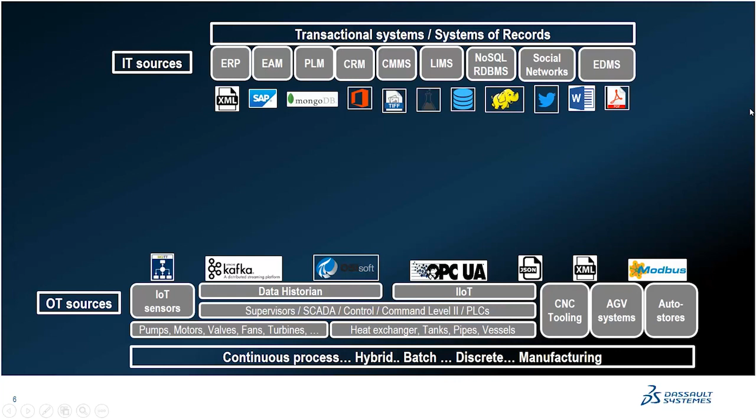Our experiences working with digital and business transformation projects suggest that we introduce an experience technology to virtually validate and contextualize IT and OT data, coupled with systems modeling, system simulation, analysis, and data intelligence. We should be able to help projects move towards production readiness.

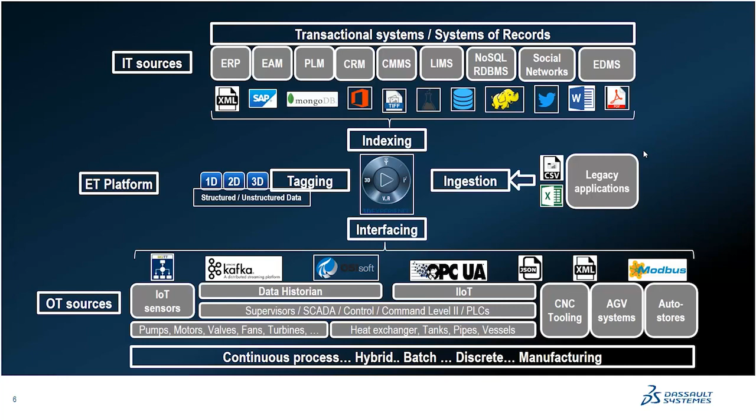Between IT and OT, we introduce ET here, experience technology, to contextualize IT and OT to optimize your business process. Let's discuss how 3D Experience Platform helps to achieve this cause.

Let's see with an example, a day in the life of an industrial IoT enabled smart factory. Industrial IoT with 3D Experience Platform are key components in helping companies maximize return on investment from smart factory initiatives. Specifically, 3D Experience Platform apps can be used to provide visibility into factory operations to gain efficiency. With insights from IoT data, manufacturers can improve the performance of their assets, their worker experiences, and improve productivity with flexibility. But what does a smart factory really look like in practice?

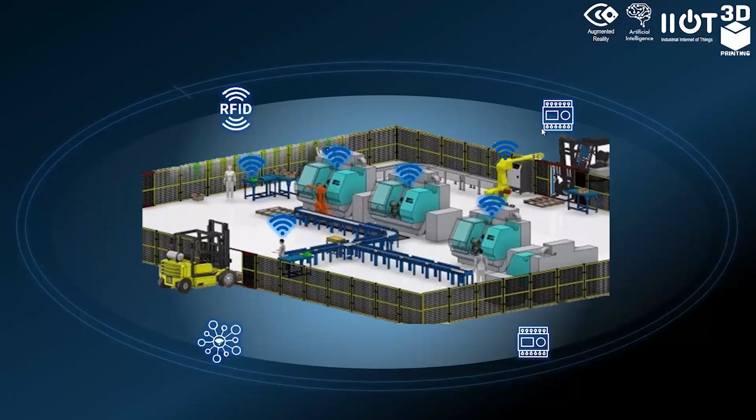Let's explore this by seeing a day in the life of an example, a fictional smart factory that uses IIoT, augmented reality, artificial intelligence with big data. Let's imagine the production shift from 9 a.m. to 6 p.m. At 9 in the morning, the production manager is validating his shift requirements of manpower, machine, materials, and methods while logging into the warehouse and inventory management portal.

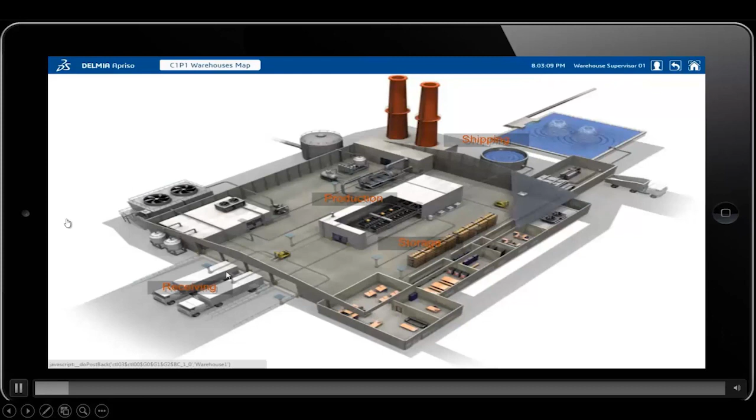He validates various materials at different locations, and realizes that he does not have enough material and components to fulfill his complete shift. But he also realizes that there is sufficient material to start his production. For the first half of his shift, he has all the raw materials.

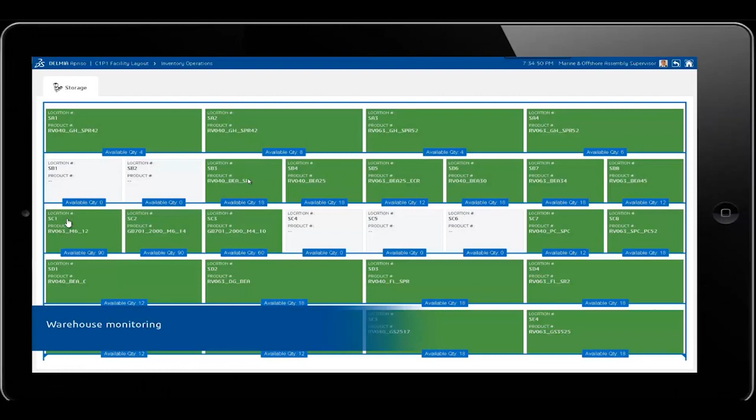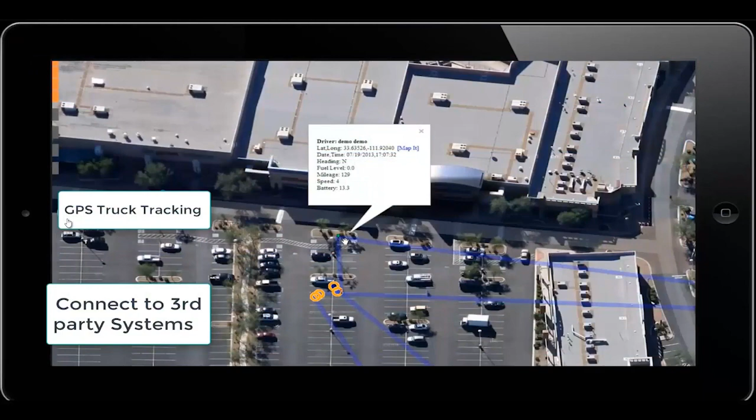But he's eager to know the status of the remaining raw material coming into the factory through electronic devices installed on the truck transporting this raw material. It sends its signal and location via cellular wireless network to the supply chain visibility system, which shows that the estimated arrival time of the truck is approximately around 11 in the morning.

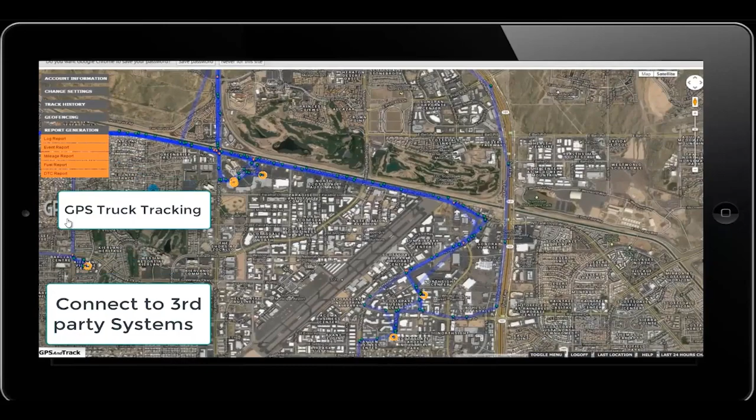Now, thanks to IoT, an alert is sent to the production manager with respect to the estimated arrival time on his smartphone as an advanced supply notification, which gives him confidence to start his production actions and work order execution.

Now the production manager starts to concentrate on his worker productivity, and the various stations are equipped with IoT applications that use integrated sensors to track machine activity. The application uses a cellular wireless gateway to transmit data into the factory's data lake.

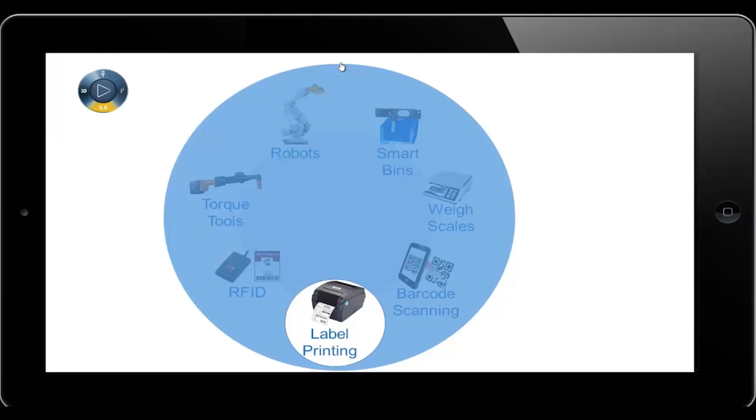The operator is also equipped with RFID for labeling items. These days, combining the use of RFID tags with both barcodes and QR codes allows the operator to connect to IoT with a simple scan of a smartphone or tablet. Having all objects marked with a QR code or barcode means improving the working environment, as operators will be more educated about raw materials and able to check for an item's availability.

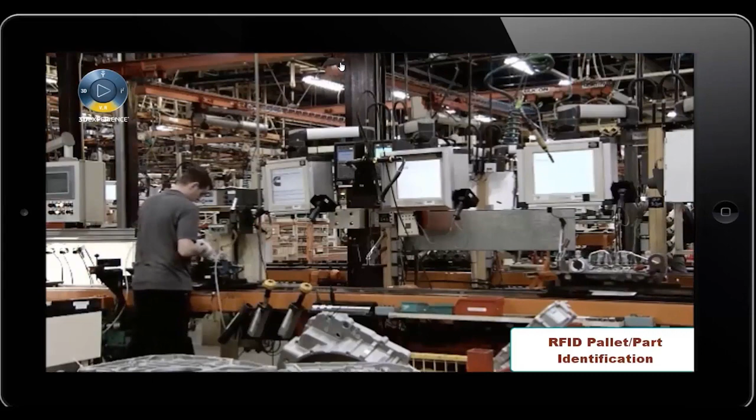So with this type of connected IoT infrastructure, the production manager realizes that one of his operators' efficiency is slightly down due to lack of skills, as this operator had replaced an experienced operator.

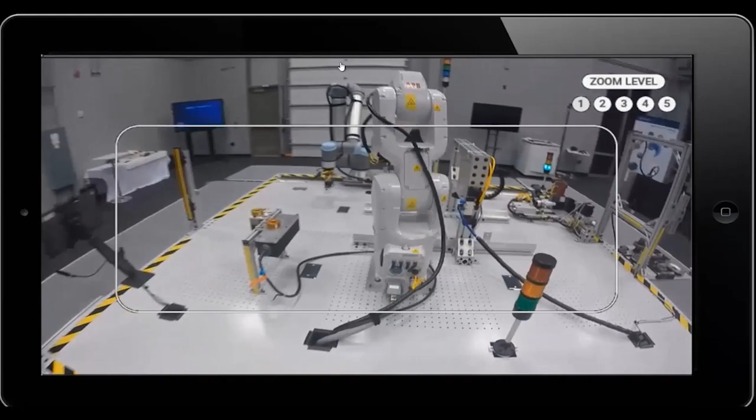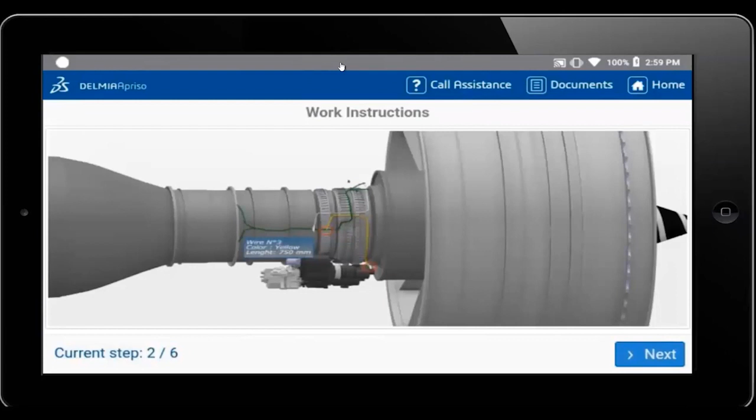This is where the production manager can assist the new operator with augmented reality work instructions, mixed reality work instructions, or even assisted reality instruction through video calls. Thanks to IoT, we have worked with our partner RealWear to enable collaboration with a field worker or someone on the plant, where he or she can collaborate and have access to remote experts through video calls. This allows operators who may not have training on a specific piece of equipment or method to get useful help through a video call.

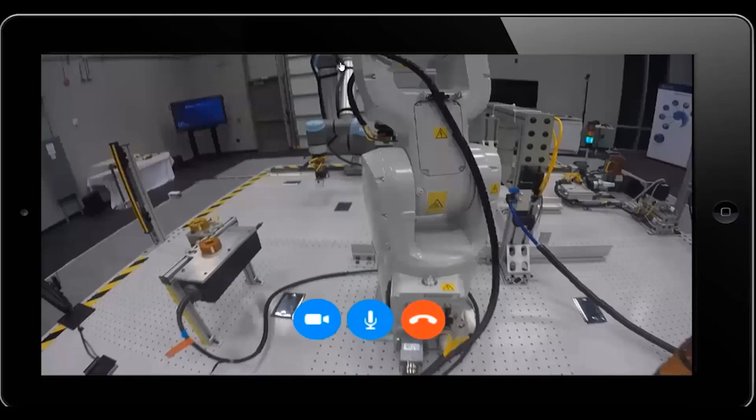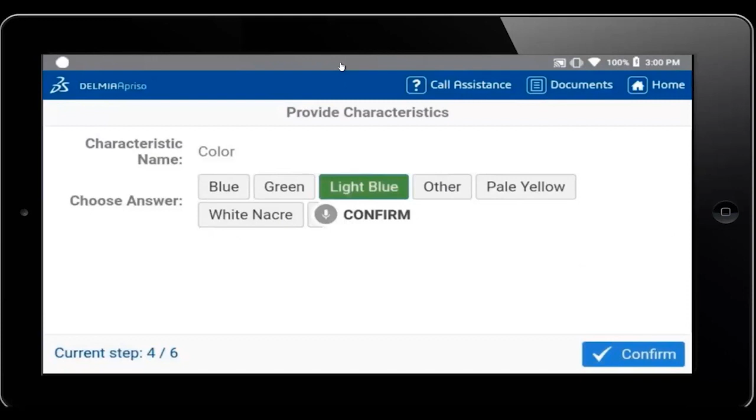Guided work instructions can provide knowledge in the form of step-by-step instructions, which can include text, diagrams, and voice commands, and zoom in to easily see the details, all while still being able to look at what is there in the physical environment. When employees scan the QR code, the device brings up the specific information required to do a particular operation or maintenance activity, and they also have visibility to all the documentation needed.

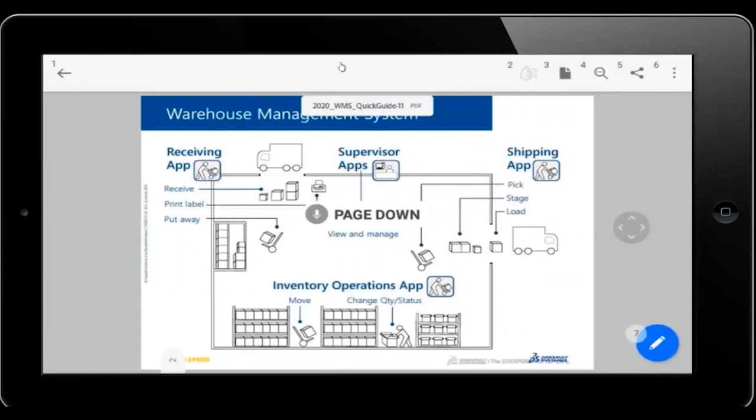Thanks to connectivity and increase in productivity, the factory is back on track to meet the production goals, and this is how operators can improve productivity, and even the production manager can intervene as and when needed.

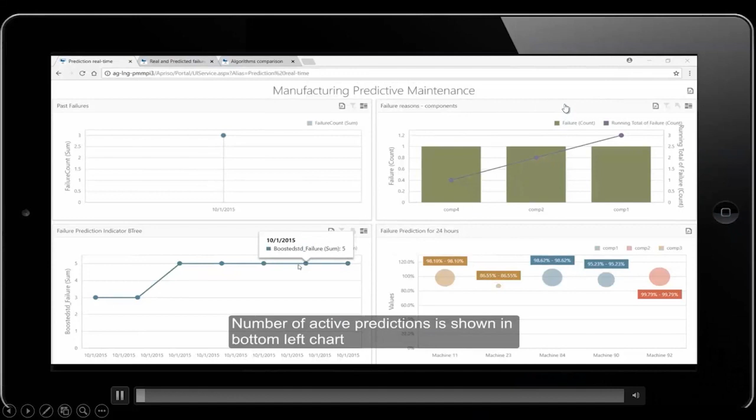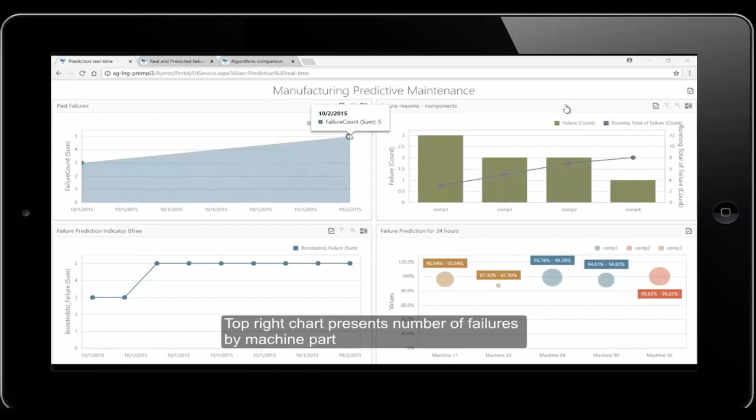In the early afternoon, the factory continues with activity. A senior operator is working on a thread grinding CNC machine, which in the past had unexpected breakdowns due to issues with hydraulic fixtures, reducing equipment availability and overall factory efficiency. Now the machine has been integrated with the DELMIA Apriso maintenance application.

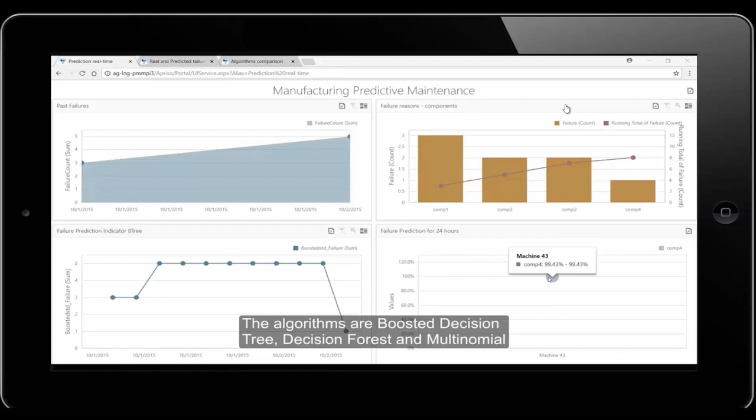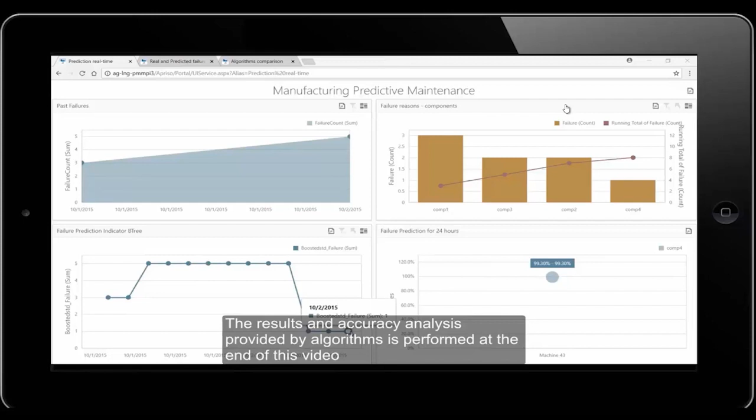Through the machine integrator, data is collected from sensors on the machine, and hydraulic pressure values are continuously monitored and captured via cellular wireless network into the company's data lake. We can use a configured application on this data for predictive analytics, and in this case we've used a boosting algorithm to predict the next action.

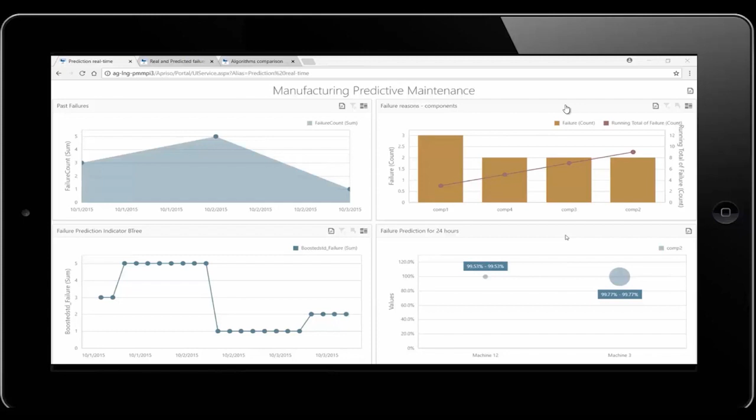With this prediction process, the production and maintenance manager can schedule a total productive maintenance action either in this shift or the subsequent shift. Doing so will not slow the factory's manufacturing processes, keeping production on track, and the subsequent maintenance action can be achieved through proper planning and scheduling.

In the late afternoon, the facility management team can take a look at energy consumption in the plant, thanks to IoT infrastructure and DELMIA Apriso for energy monitoring, which offers complete visibility of energy consumption and other utility consumption like gas in the manufacturing plant.

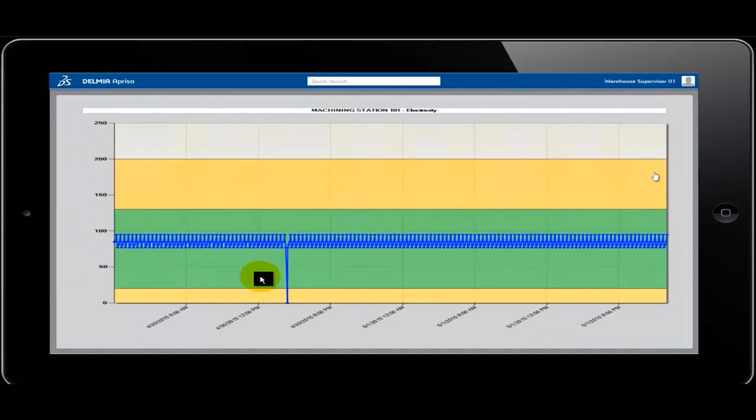With the energy monitoring system, you get real-time insights into your machine's availability and performance. This information is showcased on a dashboard that can be configured to your needs. The solution monitors equipment downtimes, which empowers you to reduce unwanted and unexpected equipment breakdowns and schedule maintenance. You can also configure overall equipment effectiveness, mean time to repair, and mean time between failure here.

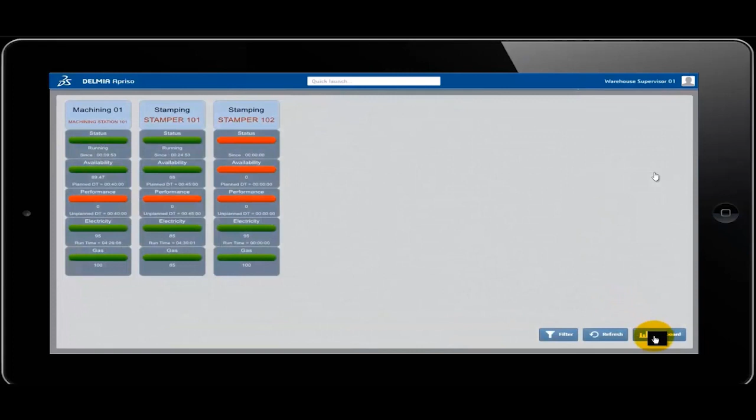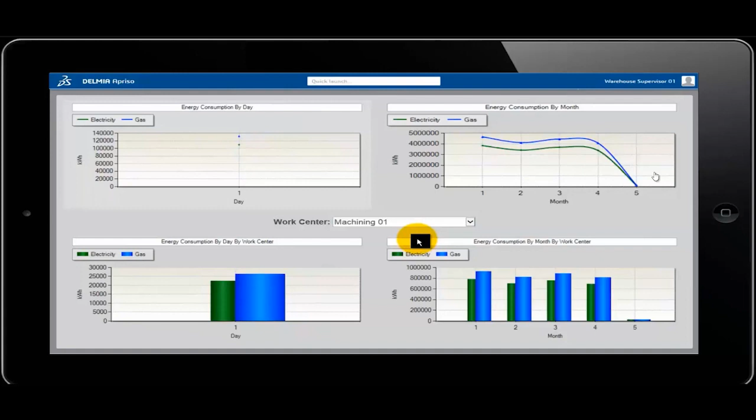With advanced data analytics, you can analyze the consumption patterns of your machines, which could result in detecting variation in consumption, optimizing cost, and getting real-time energy insights in your plant.

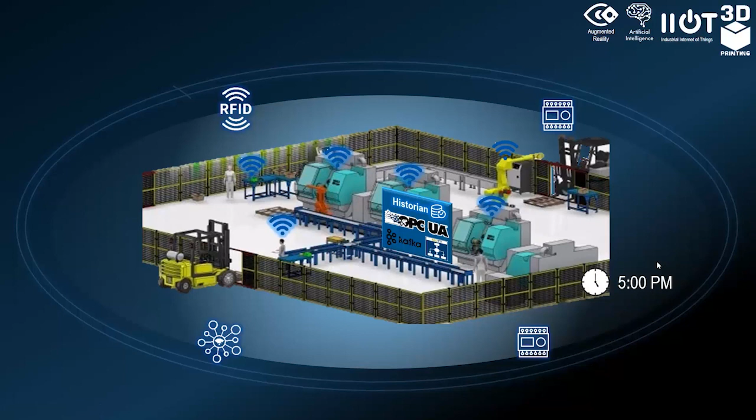Before the products are pushed to final assembly, the quality manager finds quality issues with a small batch of production. On this production line with multiple machines, robots, and conveyors, let's see how the 3DExperience platform helps identify product quality issues by detecting variation in the equipment and resource performance.

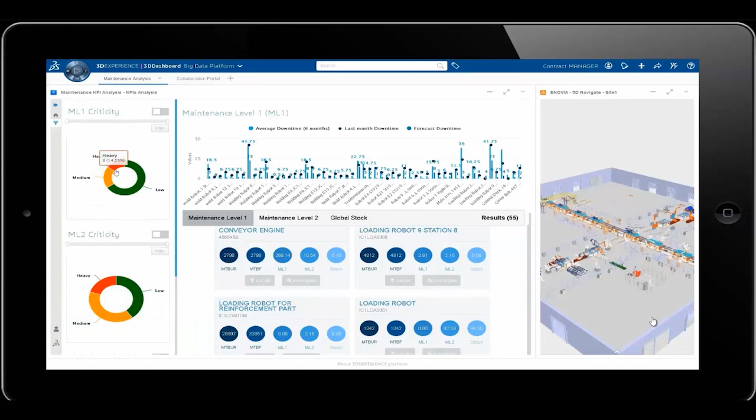In this case, the quality manager along with the production and maintenance manager collaborate remotely to identify the product quality issue. They use the 3DExperience platform's data intelligence to aggregate critical maintenance data and find that a few resources have downtime beyond standard mean time to repair or planned maintenance time.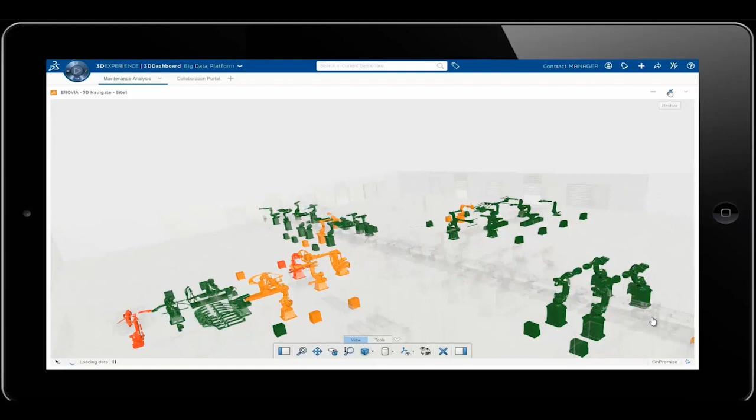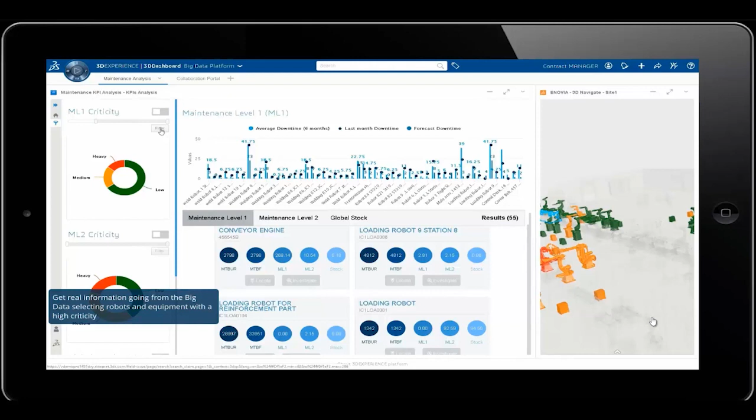Thanks to the 3DExperience platform's contextualization of IoT data, they're able to identify a particular set of equipment through inbuilt dashboard capabilities. With inbuilt algorithms, subject matter experts or data experts analyze and narrow down to particular equipment based on stoppages in previous months on a particular product line.

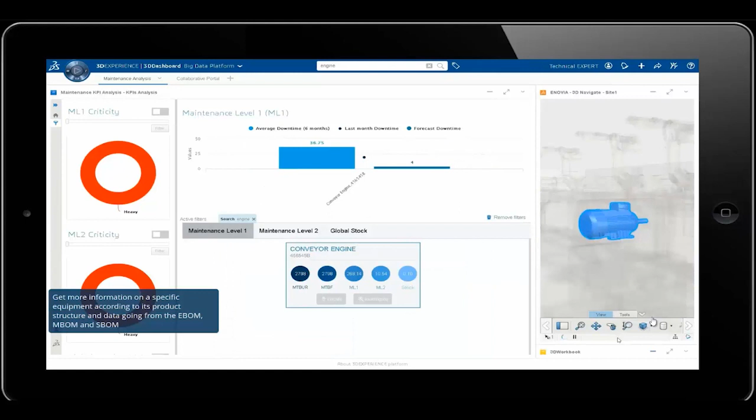The maintenance log also identifies this equipment as causing the issue. He then compares that with the sensor data, and is also helped by historical data coming from historians. Machine learning algorithms help narrow down the issue to the conveyor motor, the equipment seen slightly before, which is causing the quality issue.

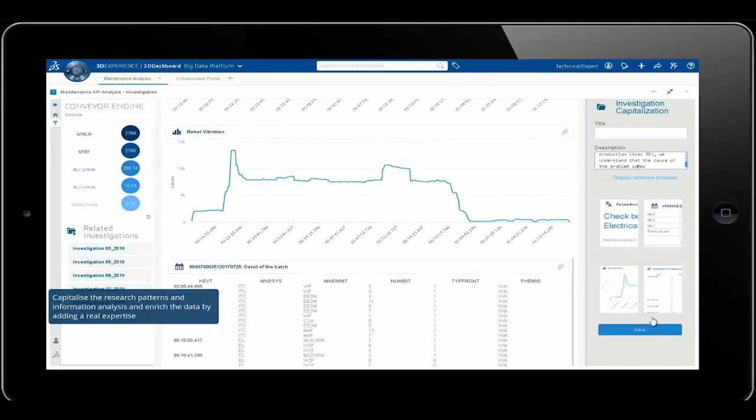This is how contextualization quickly helps narrow down a particular problem, and in this case, the quality and asset issue were solved in a fast and efficient manner thanks to the 3DExperience platform's data aggregation and data intelligence capabilities.

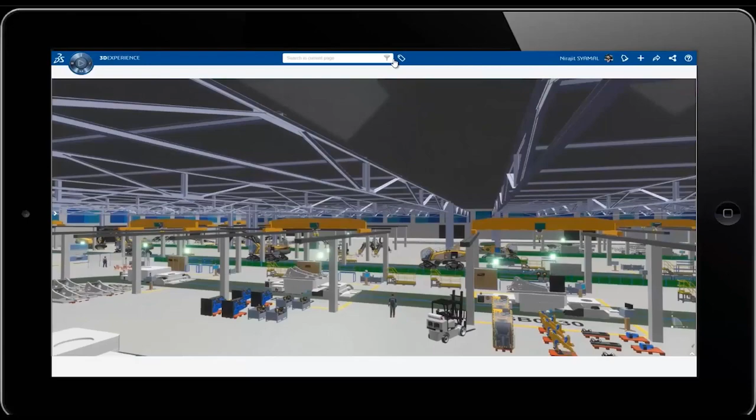As the day in the life of a smart factory demonstrates, the 3DExperience platform with IoT's ability to connect to and collect data from a manufacturer's machines, equipment, facility, supply chain, etc., enables manufacturers to dramatically improve factory performance. This includes all the previous steps seen, from validating advanced supply network notifications, productivity improvement of workers, predictive maintenance, etc.

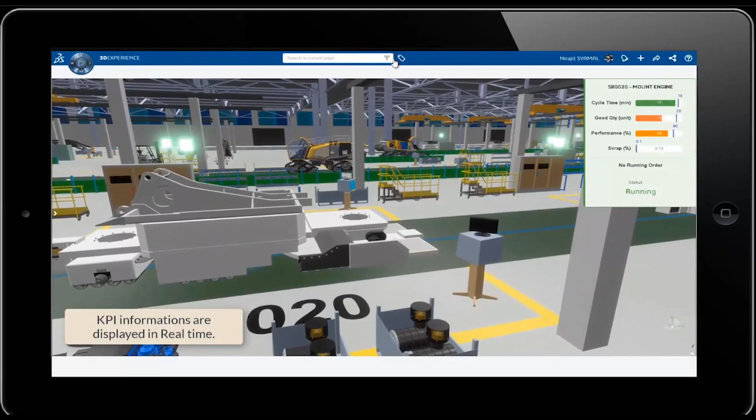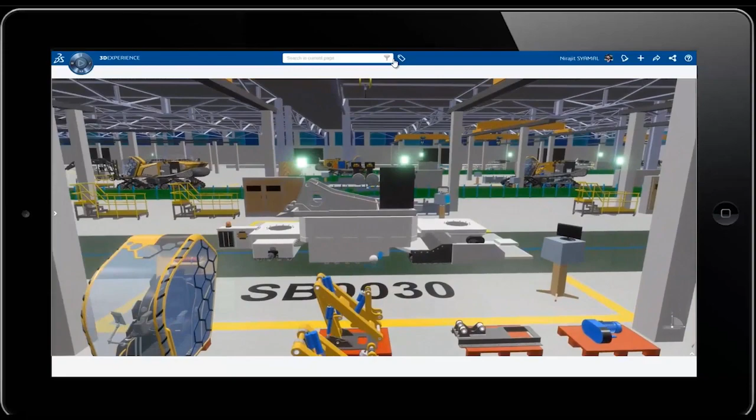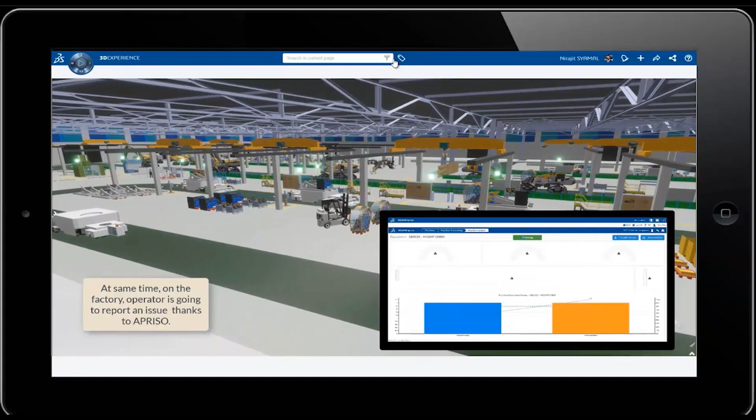All these can be seen now in a 3D world or a virtual world with real-time IoT data. This is our new role, DELMIA Operation Experience, to establish virtual twin experience. You can monitor live performance, overall equipment effectiveness, production quantity and quality, and even various utilities consumption, in this case energy consumption, in a virtual world.

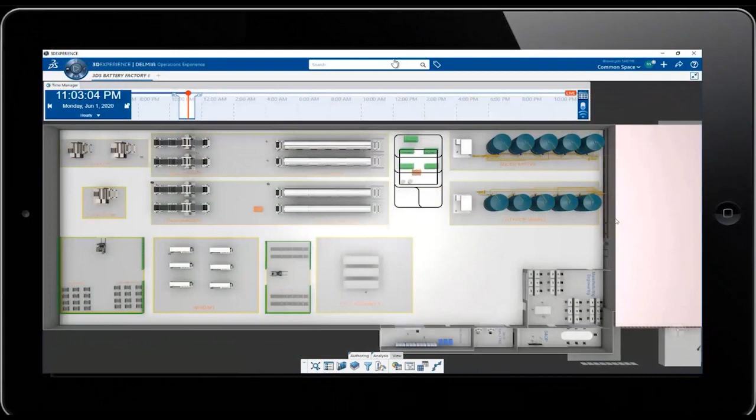This helps plant managers to better control day-to-day operations with increased efficiency and flexibility. As we are also talking about various safety issues in the factory, we can capture breaches of safety between operators who have to maintain 2 meters of safe distance while operating in the manufacturing process. With active RFID tags, you can also capture information about material movements or workers accidentally breaching safety norms, which can be monitored and captured for better training and enablement of workers.

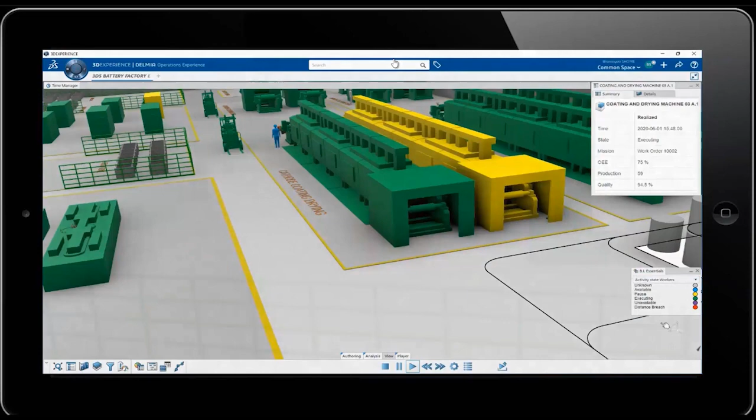In a nutshell, smart factory with virtual twin experience lets you virtually validate in 3D, contextualize IT and OT data with systems modeling, 3D simulation, analysis, and data integrity, bringing real-time experiences to update the virtual world. So this is where I'm showing the safety breach of operators who are breaching the safety distance of 2 meters, which can be captured.

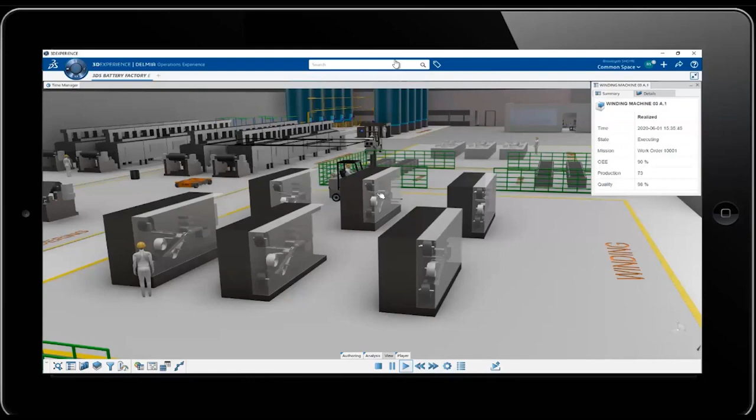By improving decision making, not just in the boardroom but also on the shop floor itself, this unique solution will help you build a factory of the future that is more efficient, sustainable, safer, and can operate remotely, delivering value to our customers.

As you have seen in the day in life example, the IoT stack on 3D Experience platform is based on business outcomes. The platform is based on user experience, user profiles, and roles, which also helps collaboration and contextualization in a 3D world. Here we are not only concentrating on business outcomes like customer experience, reducing unplanned downtimes, maximizing asset availability, and safety, but we are also talking about technology infrastructure with business applications like planning, inventory, quality, maintenance, etc. for contextualization with the IIoT data.

We are bringing in visibility and process orchestration on operations and assets so that the platform can help to learn, understand, capitalize, prevent, and anticipate business continuity, which is the need of the hour in the current business disruptions.

Now, talking about virtual twin experience, this is where the IoT data is consumed in various applications in the 3D Experience platform. The virtual twin experience is more than a static digital twin, which is a virtual model of a physical system; it brings in learning and experiences taken from the real world process to update the twin model. The 3D Experience platform is Dassault Systèmes' foundation for supporting the new virtual twin experience driven world.

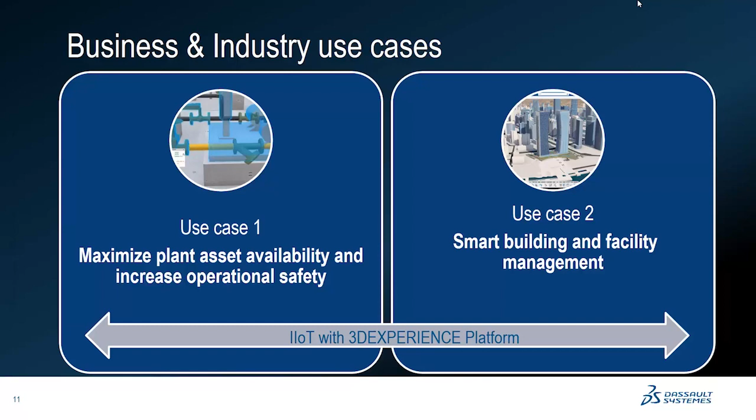Now, with that definition of virtual twin experience, let's see a couple of business and industry use cases to demonstrate IoT data with the 3D Experience platform. Two use cases: the first being maximizing plant asset availability, and the second, an important one, smart building and facility management. Let's look at the first use case, maximizing plant asset availability.

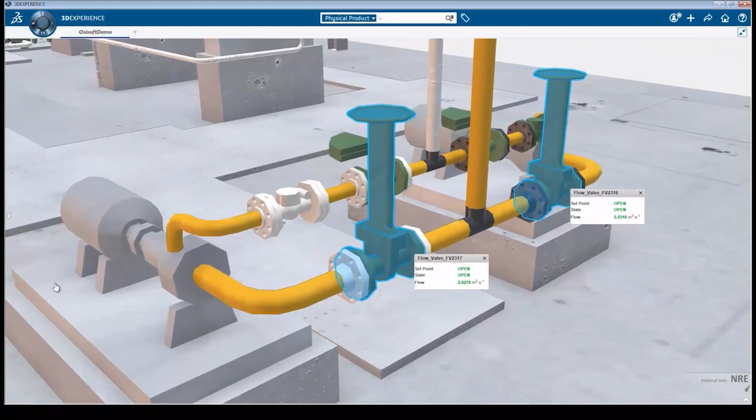Let me run a video to demonstrate. In an owner-operator organization, various business subject matter experts, maintenance and services teams get remote access to a replica of an asset, which is a 3D representation here, showing real-time data from sensors. This is the virtual twin experience I spoke about.

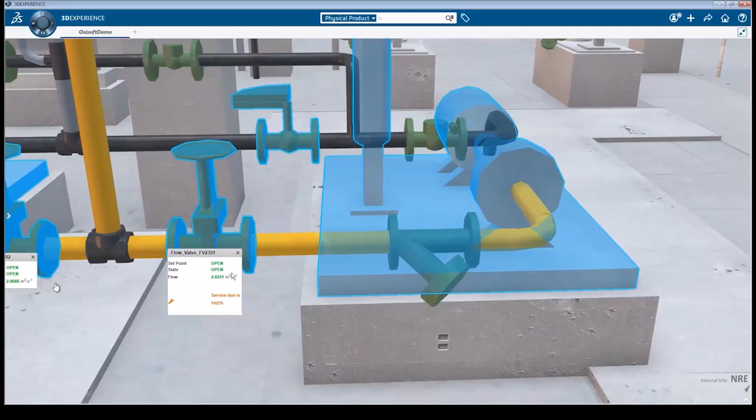With this, you're not only monitoring the asset performance live, but also validating through systems modeling, system simulation, and various processes like BOM management, plant breakdown structure, etc. You can also see who's going to execute the work orders, which field team, and the various people executing the work order. You can also establish what assets need to be maintained and repaired based on the plant breakdown structure.

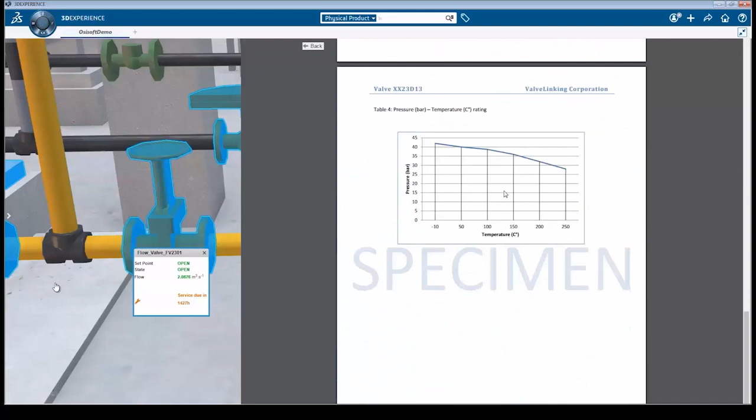And you're seeing here a PI system where the sensor data is read through the PI system based on the plant breakdown structure. The relevant documentation needed to execute a work order can also be viewed here, which is a unified data model. How to execute the work order and what necessary information is needed can be retrieved in no time, including where these assets are located and how they're integrated to a PI system through an OPC protocol.

You can also monitor the asset live, and historize the data. The continuous monitoring of this information can be historized using the PI system, which could be used. The stored data could be used for predictive modeling based on artificial intelligence algorithms.

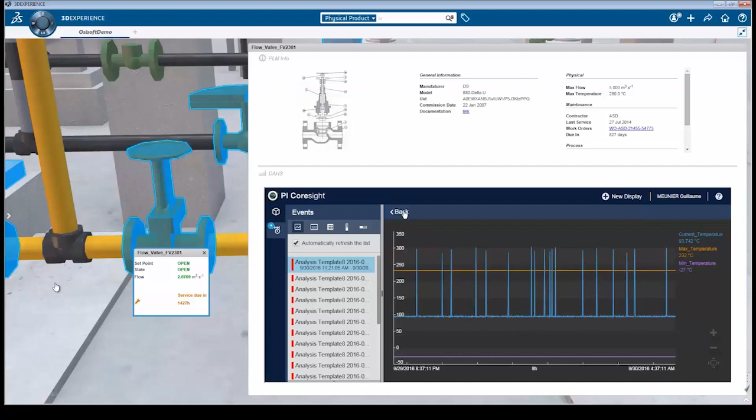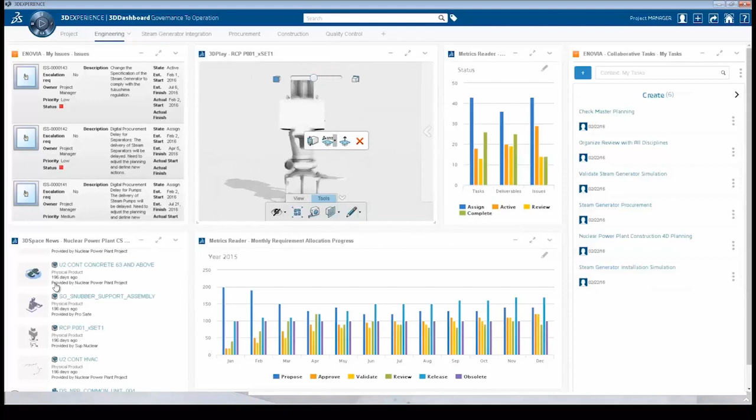To achieve this, Dassault Systèmes proposes an innovative approach: virtual twin experience in a unified environment supporting various business processes. Remote teams can operate simultaneously in a collaborative fashion, helping maintain on-site teams in safe conditions and in an efficient manner with respect to asset performance and asset management.

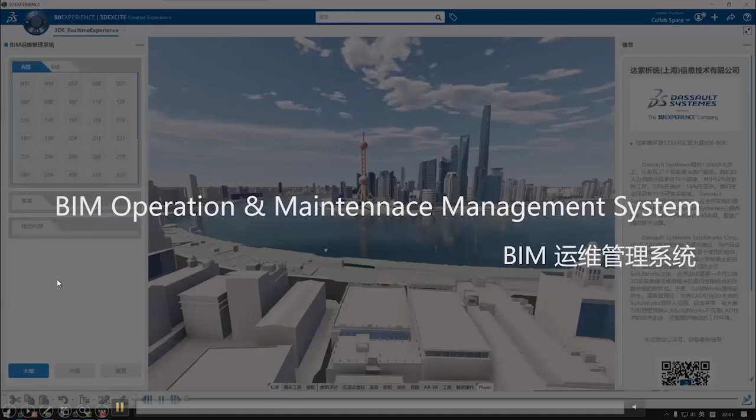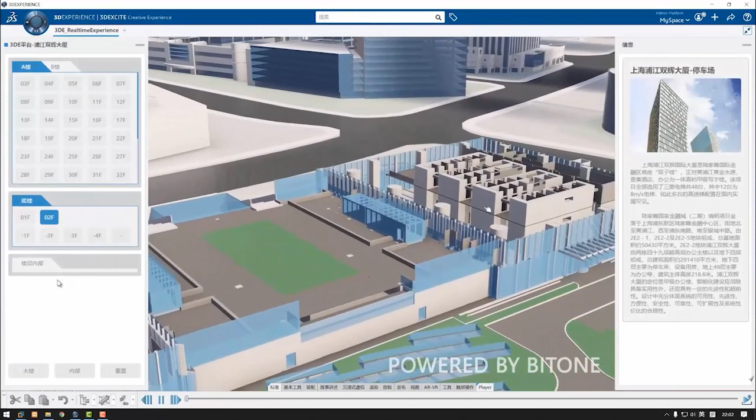Let's see an important project. This is a recent experience working with a Chinese partner establishing a new business model to monitor and service assets in operation, mainly commercial and residential buildings, hospitals, and warehouses. The BIM models on the 3D Experience platform are normally used to manage real-time building construction process. Professionals like architects, engineers, and construction managers use BIM models to efficiently plan, design, and construct buildings. Building information models increase collaboration among stakeholders at the early design stage of building projects.

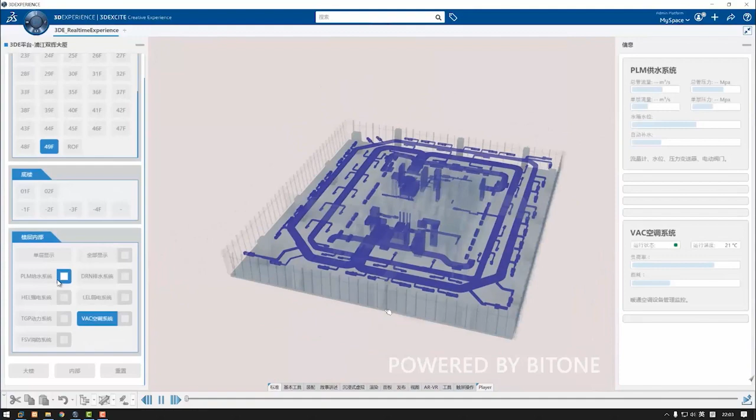The appropriate application of these 3D models also helps simplify the construction process, identify issues, and avoid last-minute costly mistakes. Construction industries are adopting manufacturing practices to bring in modular construction so they can have much better operations down the line.

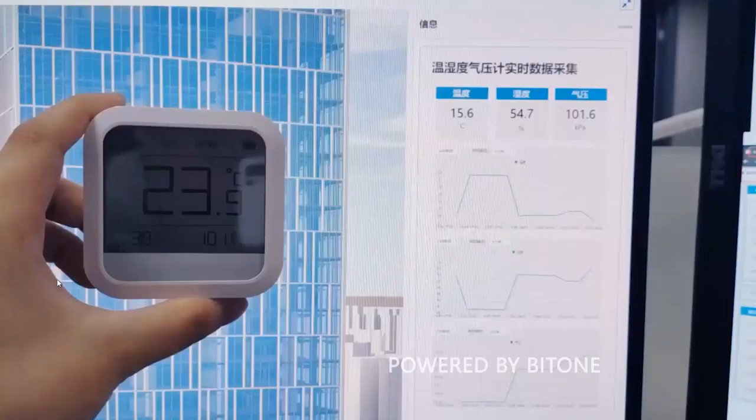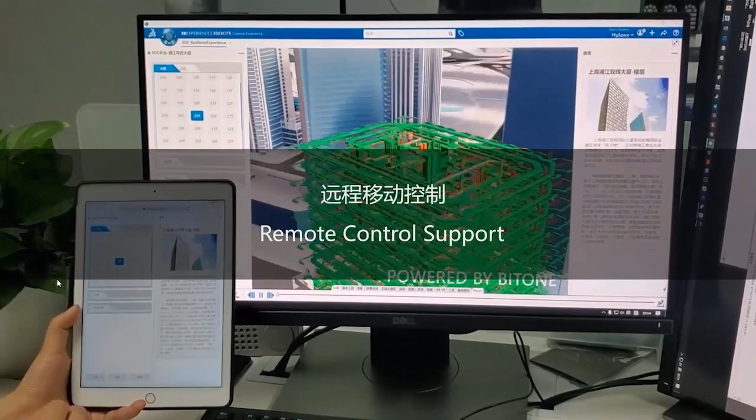The Internet of Things for smart buildings uses real-time data to optimize building design, improve construction process, and manage building operations in order to limit the environmental impact of buildings and enhance sustainability. IoT devices track and collect real-time data by connecting systems of interrelated devices to a particular network. The 3D Experience platform is helping Chinese customers lower power consumption, improve HVAC maintenance, and achieve better facility and security management.

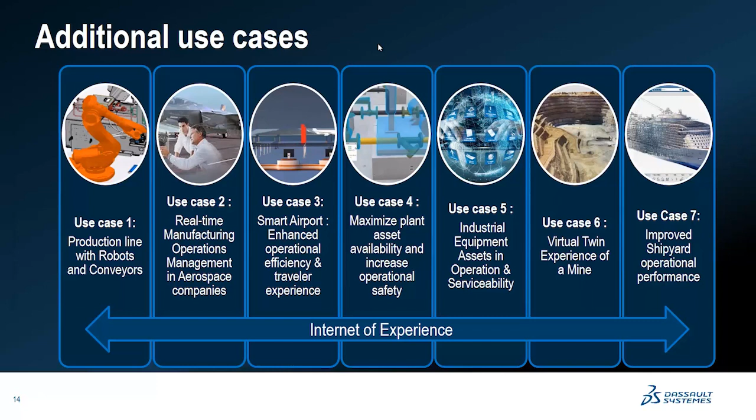The breadth of use cases is unlimited. I've listed additional use cases starting from robotics and conveyors to aerospace and defense, manufacturing operations management, smart airport management, and the example of power plant maximizing plant asset availability, industrial equipment use cases for remote monitoring of operations and serviceability, and the latest experience from the mining industry, where virtual twin experience of mining using IoT data enables remote management of mine operations. This solution can also be extended to shipyard performance management.

Key learnings from various projects: IoT technology is changing fast. IoT is transforming manufacturing, operations, product lifecycle management, and the entire value network itself. IoT is also a journey with multiple stages of maturity. Based on our experience working with multiple customers, don't just focus on things — synchronize your process and operations, as you've seen in the virtual twin experience demonstration. We need an agile, secure, and scalable enterprise architecture to cope with the multiple stages of the IoT journey.

If you're on an Industry 4.0 or industry renaissance transformation journey, both vertical and horizontal integration with the virtual twin experience platform would be key to your enterprise IoT and automation architecture strategy.

Given a chance, we could be your key strategic technology partner to accompany you in your transformation and automation journey. What we can achieve together: we can collaborate to establish your factory of the future transformation journey to increase flexibility, adaptability, and visibility with the 3D Experience platform, which will help you navigate the current crisis, emerge stronger, and enable

your sustainable operations. We have a methodology of value engagement. We can embark on a value engagement journey to support your smart factory and factory of the future by identifying and validating a clear business use case and opportunities for efficiency and productivity gains on the shop floor or added value, establishing the kind of data that would help you overcome operational challenges and inefficiencies, and the infrastructure information like communication processes that need to be in place to utilize data in a meaningful way.